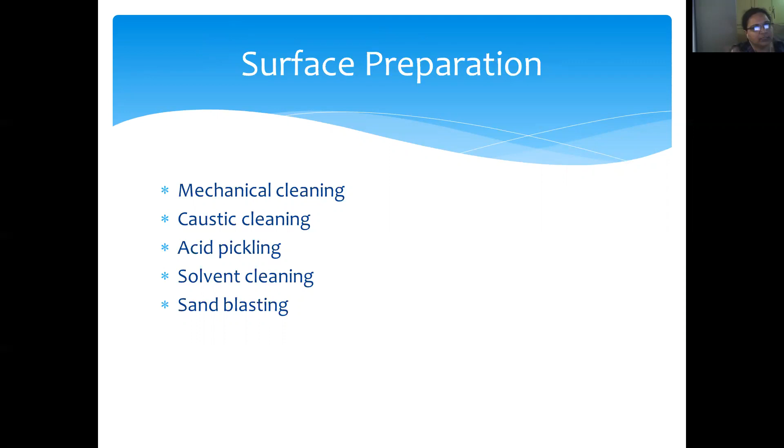These are mechanical cleaning, caustic or alkali cleaning, acid pickling, solvent cleaning, and then sandblasting. So first of all, what is mechanical cleaning? It is mechanical rubbing with a wire brush to make the metal surface smooth. Mechanical polishing or electropolishing can also be used.

Then caustic cleaning, that is to remove oil or grease from the surface by washing it with soap or alkaline water. Then acid pickling, dust or scale is removed by dipping the material in dilute sulfuric acid. Then solvent cleaning, solvents such as turpentine and kerosene are used to clean the metallic surface. Then sandblasting, a stream of sand is blown in steam to make the surface clean from other impurities.

So all these methods are done for the surface preparation, that is mechanical cleaning, caustic cleaning, acid pickling, solvent cleaning, and then sandblasting. The methods of application of metallic coatings. This is done by three methods, that is hot dipping, metal cladding, and then electroplating. In hot dipping, we again have two methods, that is galvanization and tinning.

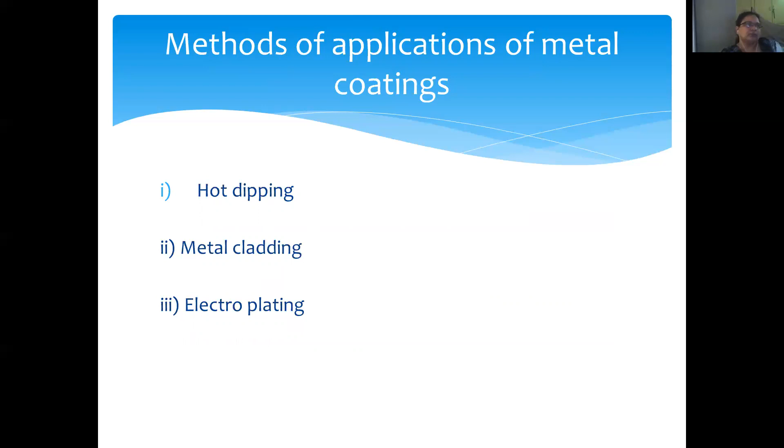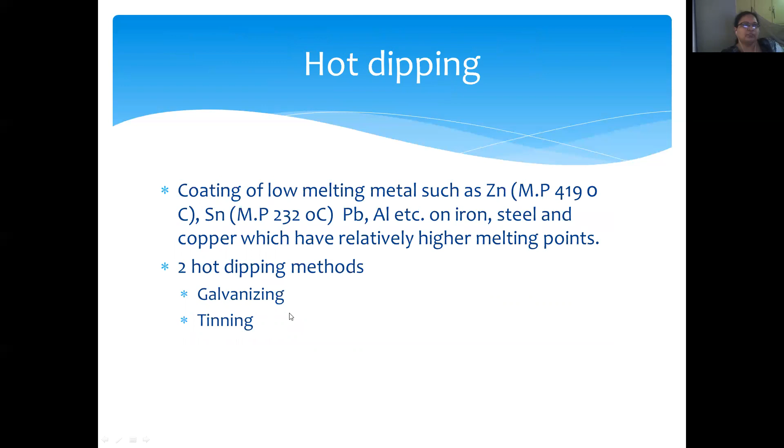So hot dipping is coating of low melting metals such as zinc on iron, steel and copper, which have relatively higher melting points. There are two hot dipping methods, that is galvanization and tinning. So coming to galvanizing or galvanization. It is nothing but coating a thin layer of zinc on the iron or steel surface in order to protect it from corrosion. Okay.

So what are the steps in it? The first step is surface preparation again. Second is hot dipping, and third one is annealing. Annealing is nothing but cooling. So the iron or steel articles such as sheet, pipe or wire are cleaned by pickling with dilute sulfuric acid solution for 15 to 20 minutes at 60 to 90 degrees centigrade. So acid pickling is done. Pickling helps to remove scale, dirt, oil, grease or rust and any other impurities present on the metal surface.

Then the article is washed well and then dried. It is then dipped in a bath of molten zinc maintained at 425 to 430 degrees centigrade. The surface of the bath is kept covered with ammonium chloride flux to prevent oxide formation. It is then passed through a pair of hot rollers to remove any excess zinc, and this produces a thin film of uniform thickness. It is annealed at a temperature of 650 degrees centigrade and finally collected.

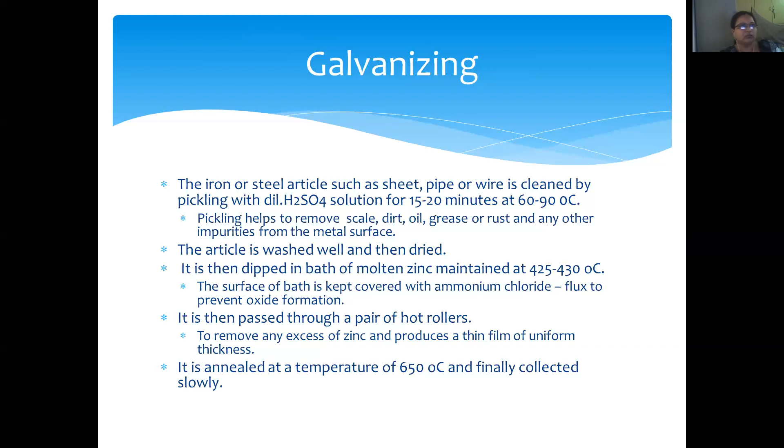And then we pass the sheet through an annealing chamber where it is cooled, and then the sheet is used for preparation. That is, it is now left for use. So where is it used? Where is this galvanized sheet used?

So it is used in roofing sheets, wires, pipes, nails, bolts, screws, buckets, and tubes. So all these things are done by galvanization. So galvanized sheets are used for these purposes. Okay?

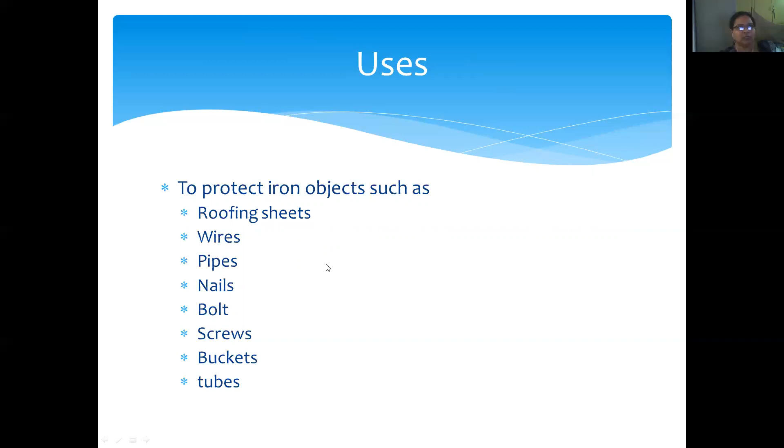So galvanized utensils cannot be used for preparing and storing foodstuffs, especially acidic ones, since zinc gets dissolved in acids, forming highly toxic compounds. So here we have to remember that galvanized articles are not used for storing food articles.

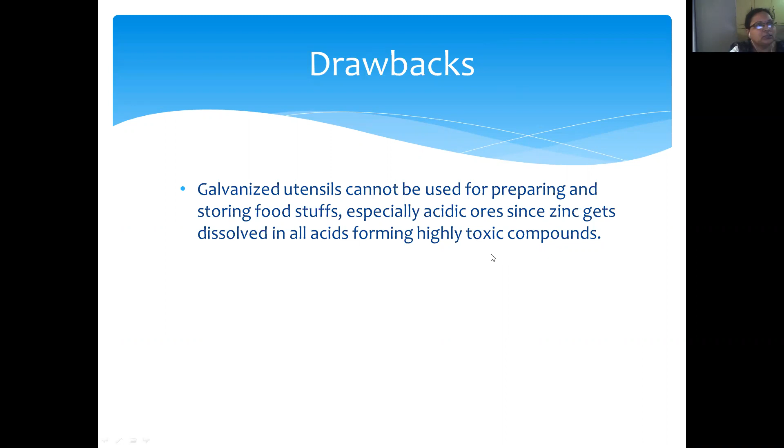Okay, so one has to remember that these galvanized utensils cannot be used for storing foodstuffs because zinc dissolves in acids, forming highly toxic compounds. Okay? So this is the main disadvantage of the galvanized utensil.

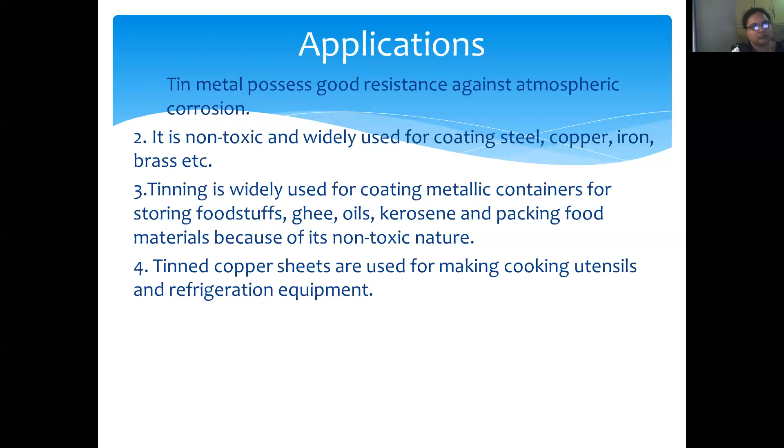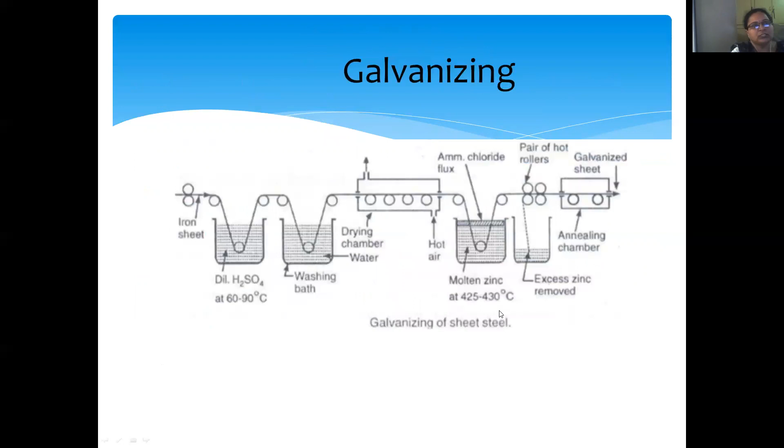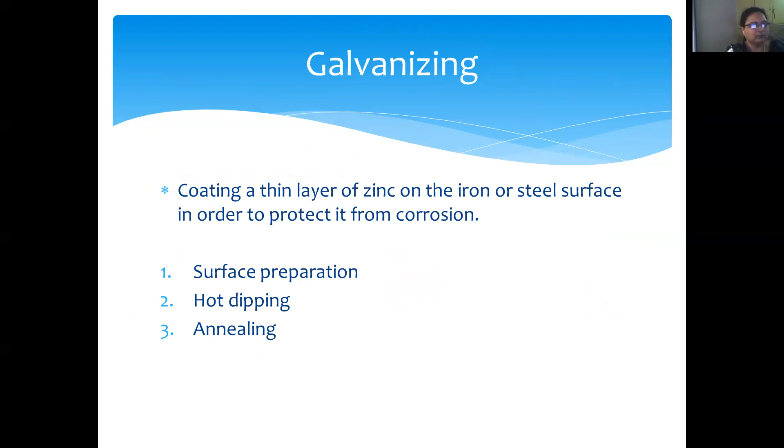So these two are the main types of hot dipping, because we are doing it in hot conditions. Tinning is at 250 to 290 degrees centigrade and galvanization at 425 to 430 degrees centigrade. That is why these come under the hot dipping procedure. These two are very important, application-wise as well as in industry.

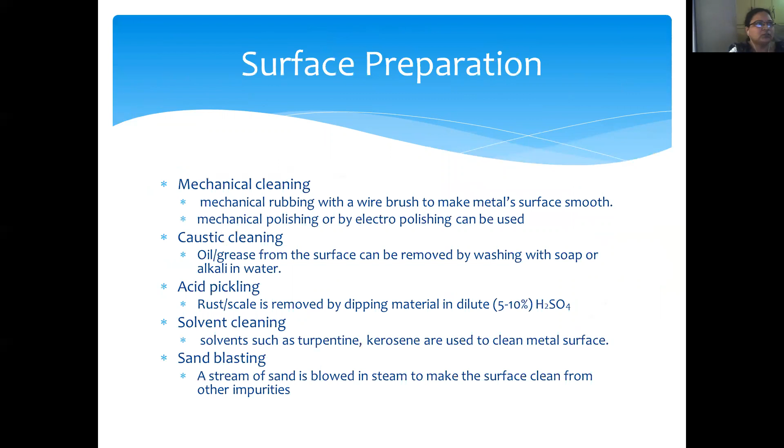In the next class, we'll discuss another two methods, that is, electroplating and electroless plating methods.